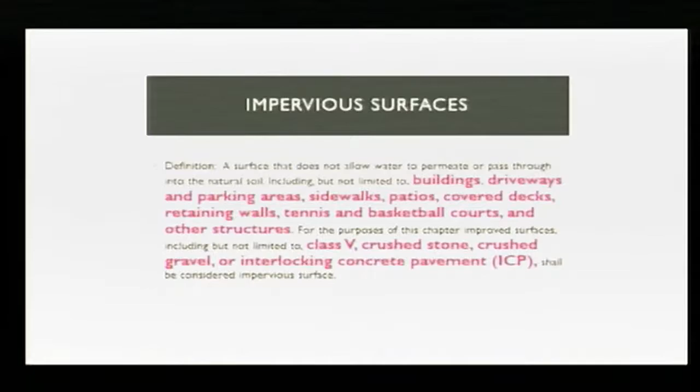All right, so we're going to start with our edit to impervious surfaces. It previously included buildings, driveways, parking areas, sidewalks, patios, covered decks, retaining walls, things like that. We added Class 5 crushed stone, crushed gravel, and interlocking concrete pavement. These are surfaces proposed for driveways, parking pads, things like that. We added this to the impervious surface definition in order to consider these towards lot coverage. We don't want someone having entire parking lots on their property, but we do want that balance, so we are considering them impervious surfaces as they will be proposed to be designed.

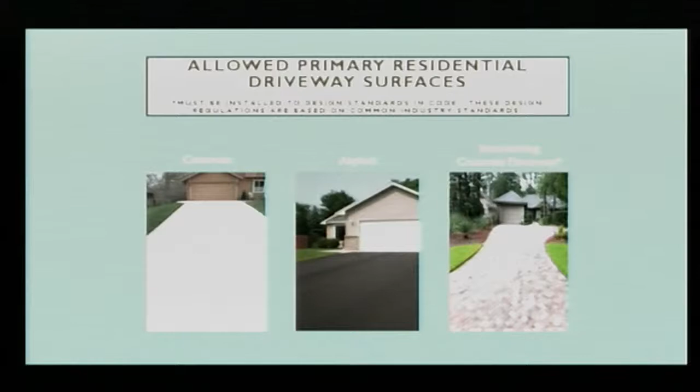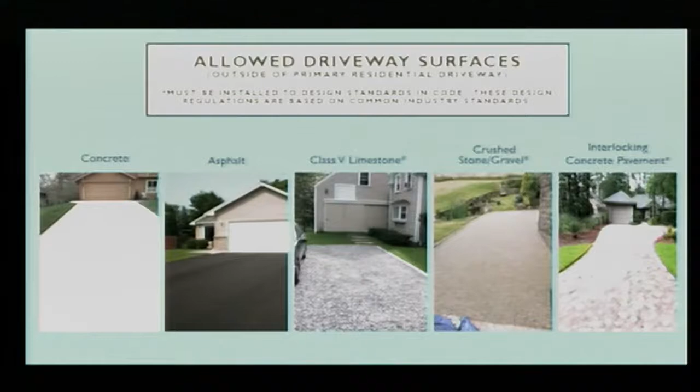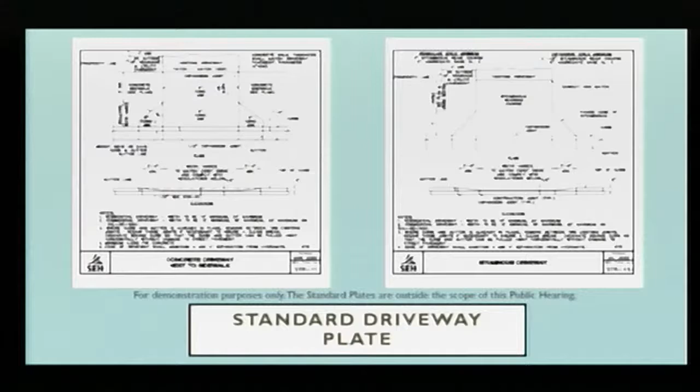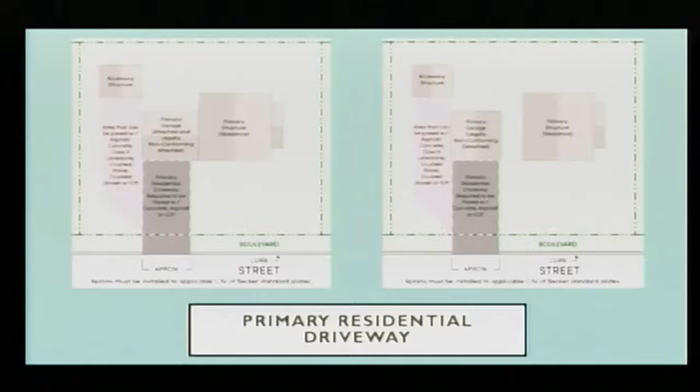And then we've created this: well, what if I don't have a sidewalk or a trail or anything like that? There are definitions where your driveway comes straight down to the street without the tapers, detached and attached again, just showing the surfacing. So they're very similar, just no sidewalk here.

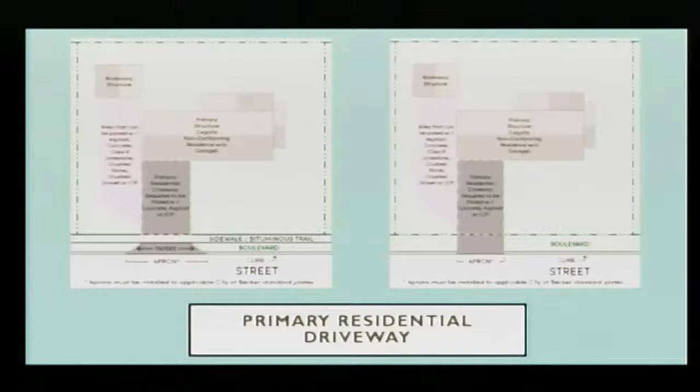And then this is a legally non-conforming residence without a garage. It requires that a surface be paved up to the front face of the house. The accessory structure shown could, like Marie mentioned, just be a small garden shed or anything like that. If you wanted to pave an area to that garden shed for your riding lawnmower or something, you could definitely do that. But the goal is to have a primary residential driveway paved up to the face of that house. This also shows a version with a sidewalk and one without.

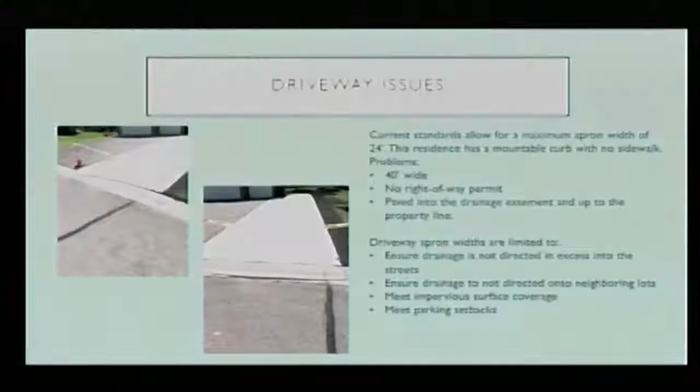All right, so this next slide shows some of the issues we've been working through, not only with community development but Public Works was also involved. This is showing some of the expanded driveways that have been built in the city of Becker. This one here is actually paved all the way out to the road, so it would have required that right-of-way permit since you're within that city right-of-way area. And this one, from what we can tell, is also paved up almost to the property line.

So with the proposal we have tonight, there is a setback from the property line. We don't want to direct any drainage onto neighboring lots, and we're also not wanting to collect all that drainage from that parcel and bring it to the street.

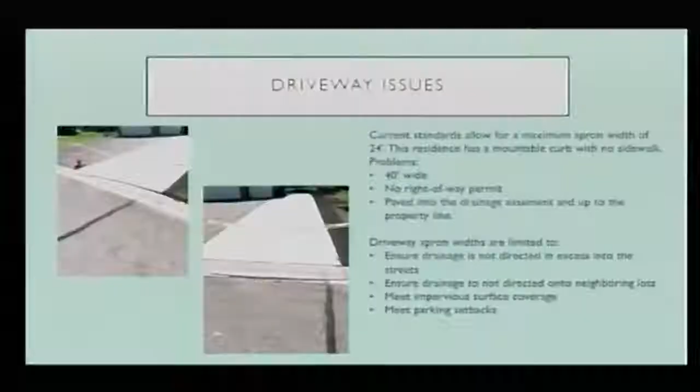We know that causes issues with our storm drains, especially if there's dirt in there. It can clog those storm drains and cause flooding. Another piece noted here is meeting parking setbacks or parking on the street. So if you think about cul-de-sacs, when you get wider driveways and someone wants to have a grad party or friends over, pretty soon that cul-de-sac has no on-street parking after multiple houses do it. So that's something we tried to keep in consideration.

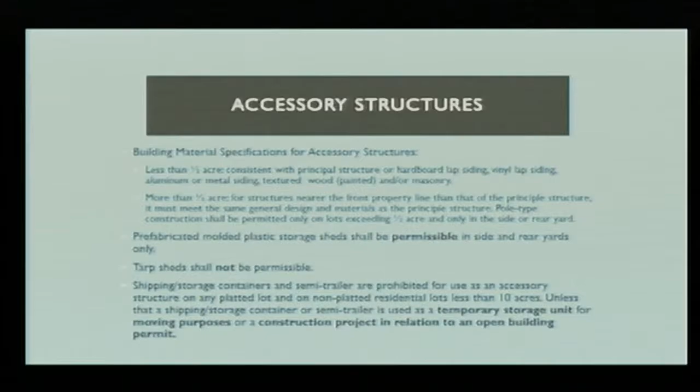Otherwise, the last ones that we cleaned up, and this is the last piece within chapter 11. So we did clarify, right now with our zoning map and our zoning code there's a conflicting area that's not existent, so we are removing that R3/office and changing it to commercial R2.

And then the iPark facades, there was an editing error in one of the last updates, so we are including that 30% of the building face on that facade needs to have that decorative rock or brick, whatever it is that they choose to go with. That's listed in our design standards, so it's clarifying that one.

And then the iPark in the industrial park, that height clarification also had an editing error. There is a conflict between 50 and 80 feet, so it does clarify that at 80 feet.

Otherwise, with that, you can open the public hearing too. Does council have any questions for Marie before we go to the public hearing?

If not, I'll go ahead and open the public hearing at 5:33 PM. And if we have anybody for the public hearing, you can come up to the podium. You can remove your mask to speak, and then if you'll just state your name, first and last, and go ahead.

Hi there, my name is Pete Wiseman. And question on some of the parking regulations - do we have anything in the books that specifies how many cars somebody can have in their driveway?